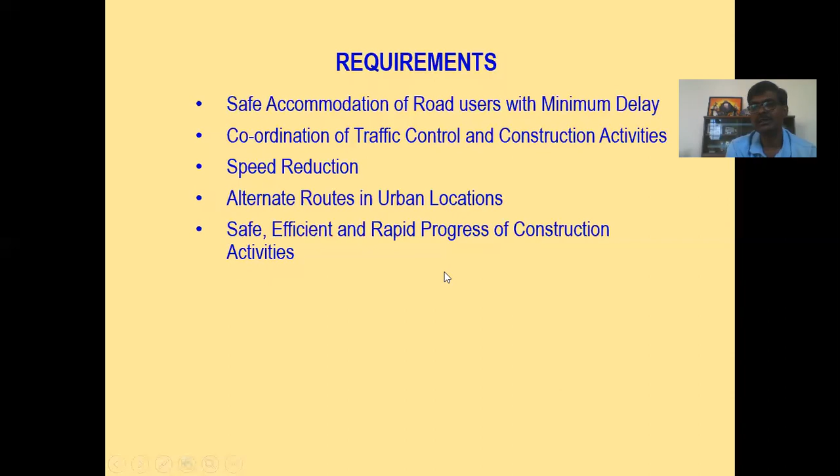And if the construction is in urban locations, we should always look for alternate routes for traffic management, traffic diversion, if there is an opportunity. So we should look for alternate routes in urban locations. And then there should be rapid progress in the construction activities so that the delay for road users is reduced. But there should be safe and efficient progress of construction activities. It's not that you are only targeting the progress. No, progress with safety is the important requirement.

There are guiding principles for safety during construction. Number one, we need to warn the road user very clearly, well in advance, not suddenly telling there is a construction activity going on. And we need to provide safe and clear marking for guiding the road users. There should be enough markings and a safe passage area for guiding the road users properly, and this guiding should be safe. So we should provide safe and very clear guidance for road users through road safety furniture, through pavement markings, and so on.

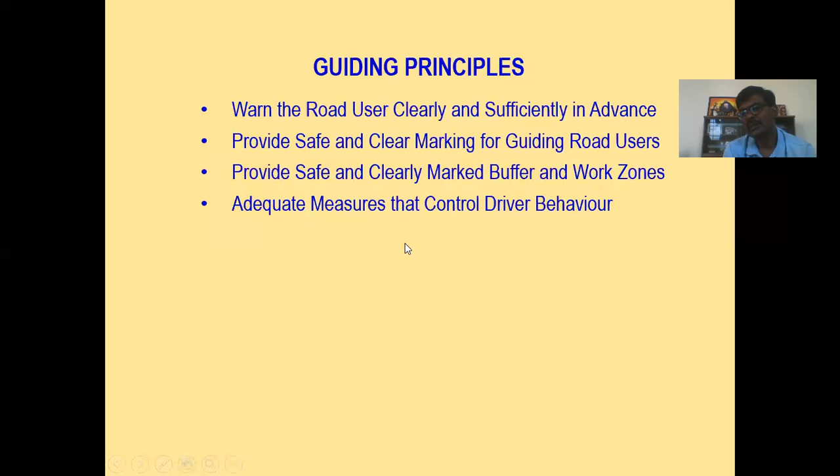The other principle is we should provide a safe and clear buffer for the work zones, both lateral and longitudinal buffer zones. What is this buffer? I'll show you a little later. We need to clearly mark which is the working zone and which is the buffer zone. And there should be adequate measures to control driver behavior when passing through the construction site. So these are the guiding principles: warning the road user well in advance, providing safe and clear marking for guiding the road user, clearly marking the buffer and work zones, and adequate measures for controlling driver behavior.

But there are some legal aspects that need to be followed for the construction zone. We need to obtain legal permission from the road authorities, traffic authorities and local police. The contractor has to obtain the permission because he is awarded the contract. He cannot just go and stop or divert the traffic or partially control access. So he has to take the necessary permissions from the authorities concerned. Number two, construction is important, but any construction activity causes inconvenience to the road user, so there should be minimum inconvenience to the traffic. The contractor has to take all necessary steps to ensure this.

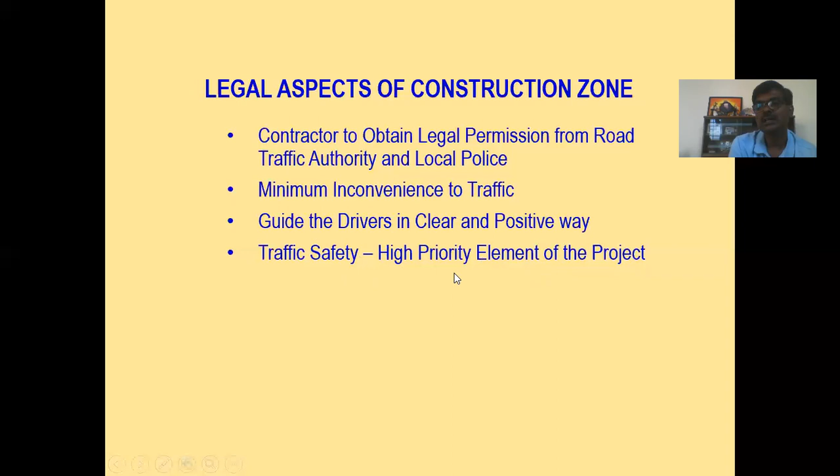And the third aspect is he should guide the drivers in a clear and positive way. Overall, traffic safety should be given very high priority. Unfortunately, this is not so in our country, but slowly we have started giving importance to it for many reasons and compulsions from the department, the police, the court, and so on. So now, truly, safety is considered a priority in construction. If you take the construction zone, there are four components in the traffic control zone.

There are four components in the traffic control zone in the construction site. Number one, warning zone. Second, approach transition zone. Third, working zone. And fourth, terminal transition zone.

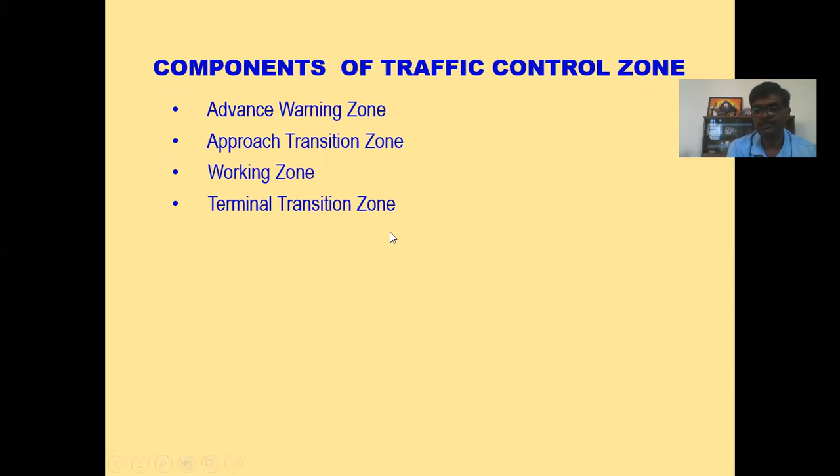So now let's look at the advanced warning zone. This zone. So what do we do in the advanced warning zone? We warn the road users about the presence of hazard. What is the hazard here? The construction. And we even tell what is the distance to the hazard, 500 meters ahead, 300 meters ahead. So we indicate to the road user the distance to the hazard and also the presence of hazard through signages.

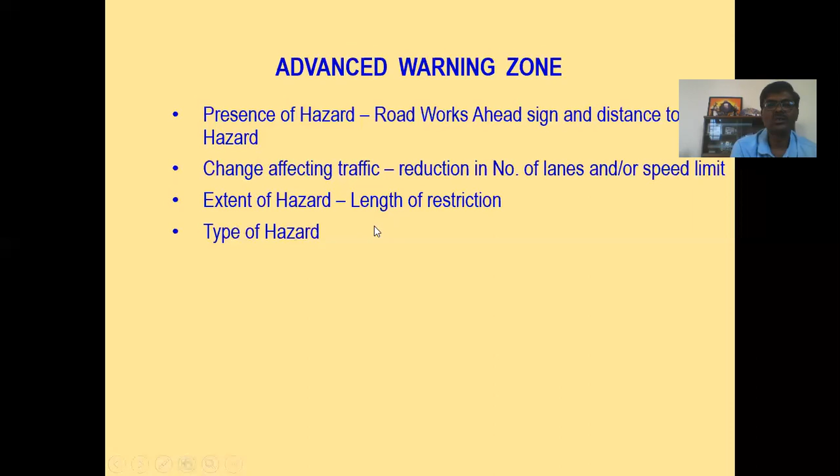So type of hazard is also conveyed here. Extent of hazard is to what length the hazard exists, for 200 meters, 300 meters, half kilometer, for next 1 kilometer. This is the extent of hazard. The type of hazard is deep excavation, overhead clearance, and so on.

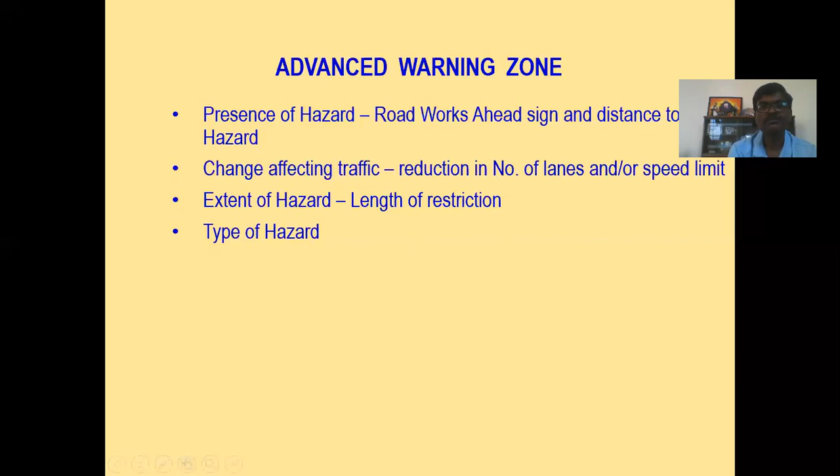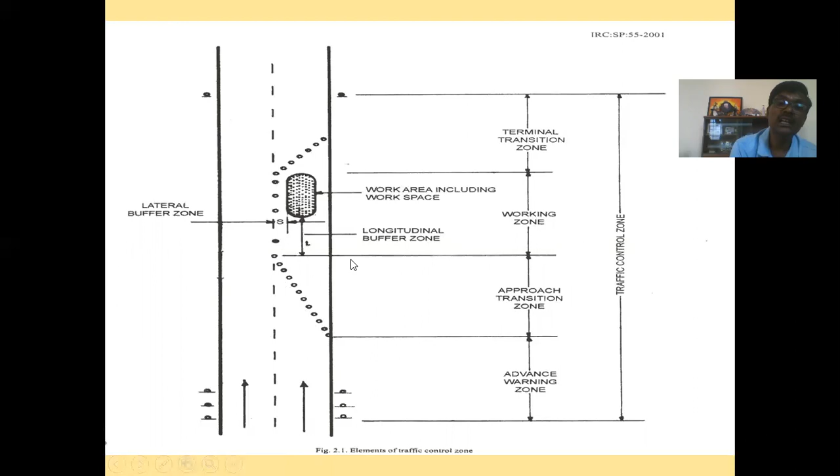Then, after the warning zone, comes approach transition zone. It's a crucial zone. There are several factors to be considered in deciding the length of the approach transition zone. Number one is the turning radius of the largest vehicle. You have seen here, this is the approach transition zone, and this length is decided based on the turning radius of the biggest vehicle using this road facility. Let's say if this barricade is perpendicular, direct 90 degree, then vehicles cannot maneuver. So depending upon the turning radius of the vehicles used, the length of transition zone is decided.

And drainage system in the construction area is to be carefully considered while deciding the transition zone, because we may be damaging the existing drainage system in the construction area, so there are chances of ineffective drainage. So we should take care of the drainage and avoid ponding of water in the construction area. So this also plays an important role in deciding the length of the approach transition zone.

In addition to that, the quantity of dust or the effect of dust that is likely to rise in that construction area also influences the length of transition zone. Barricades, signages, channelizers, markings are very essential in the transition zone. Night visibility is to be achieved through using reflective sheets, reflective paints, and we need to control the traffic through signals or by manual flagging in the transition zone, and need to clearly demarcate the waiting area in the transition zone.

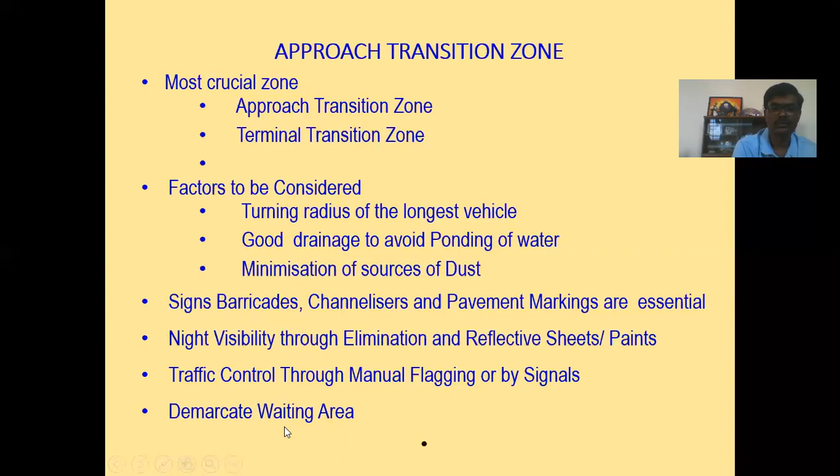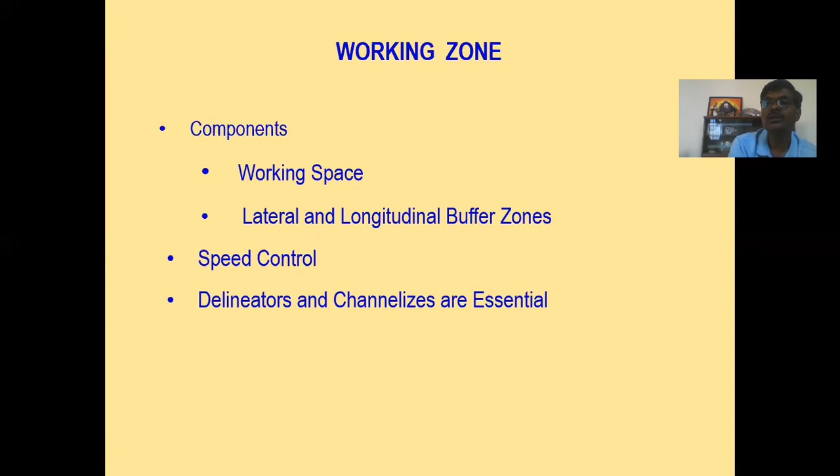So then comes our working zone, the actual working site. This working zone consists of two components. One is the actual working space, and as said, the lateral and longitudinal buffer zones. So controlling the speed in this zone is very important. We need to use appropriate road furniture and signages to control the speed. Need to effectively utilize the delineators and channelize the traffic. Channelizing and delineating the traffic are very essential aspects in the working zone, so that the work is not hindered and safety of the road users is given due importance.

Then comes our terminal transition zone, the last zone. Compared to the other zones, the warning zone, the approach transition zone, and the working zone, the length of this terminal transition zone is very less and needs to be less. This distance is only required to clear the work area and return to the normal traffic lanes, and generally this length is less. And what is the length of this terminal zone?

It extends till we see an end restriction sign. So that means this terminal transition zone ends where this signage is installed, the end restriction or end signboard. So that you should know.

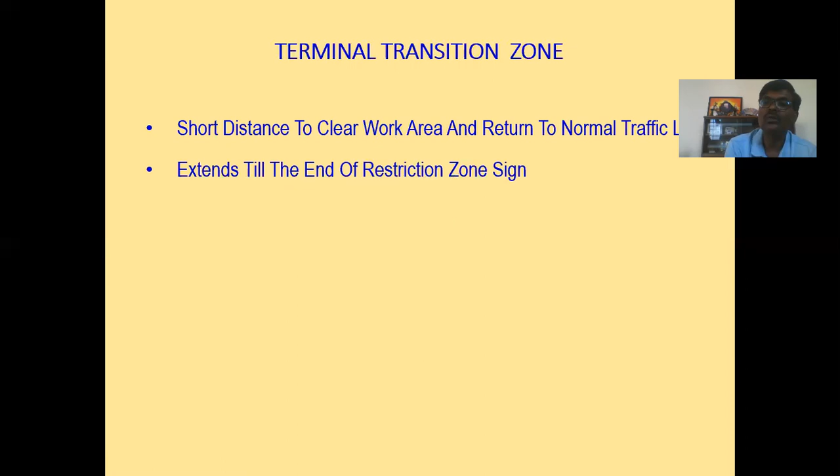So here comes the length of different traffic zones: warning zone, transition zone, working zone. And this length depends on what is the speed of the vehicle. If the speed is 50 kilometers or less than that, the length of advanced warning zone is 100 meters. The length of approach transition zone is about 50 meters, and length of working zone varies depending upon the type of construction activity and its requirement.

Let's say if the speed is more than 81 kilometers and up to 100 kilometers, the advanced warning zone varies from 300 to 500 meters. Approach transition zone varies from 100 to 200 meters. And of course, the length of working zone varies depending upon the type of activity and its requirement. So, the length of the zones depends on the average speed of the vehicles.

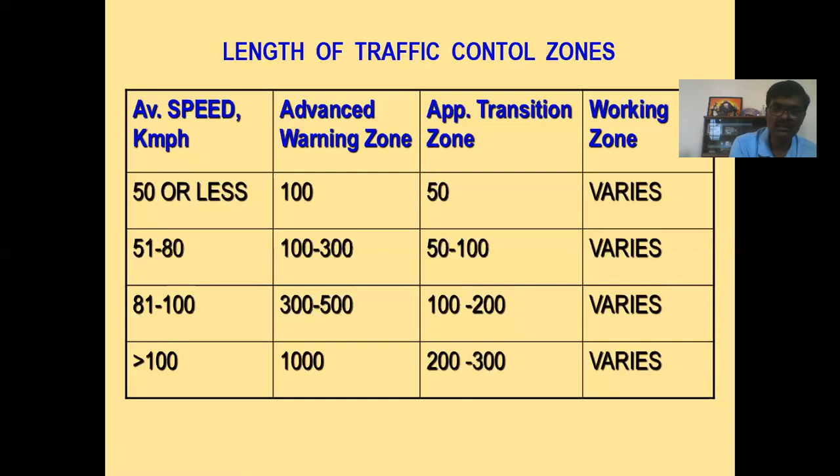As said, we need to use various traffic control devices to control, to guide, to warn the traffic in the construction zone, construction areas, construction sites. And these traffic control devices play an important role in warning the road users, informing the road users, guiding the road users, modifying the behavior of road users, and protecting the road user and also the vehicle, and provide safe working area, thus ensuring the safe passage of road users in the construction area. So these traffic control devices play an important role.

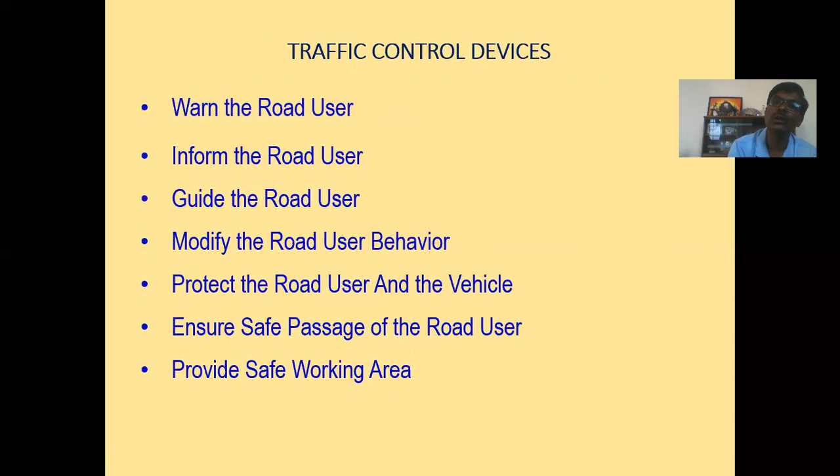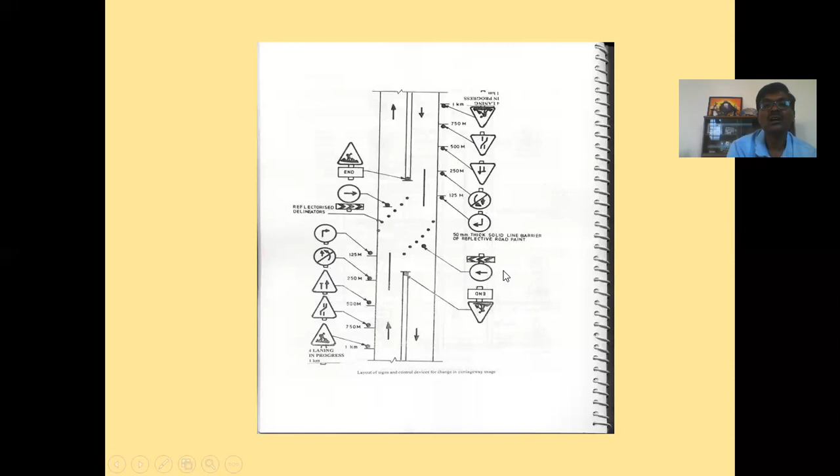That means work in progress, 1 kilometer well in advance, the signage is placed. Similarly, the change in direction of the lane is placed 750 meters ahead, and preference warning indicator signages 500 meters in advance, and so on. Similarly, on the other direction, you can also see end of the construction work signage here.

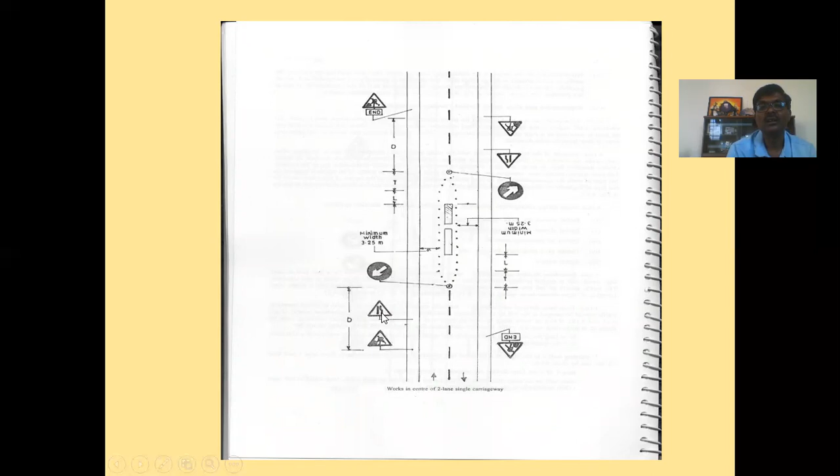So this is the work on a two-lane carriageway in the center. So here also you can see different signages, direction signs, end of construction, and reduction in number of lanes, warning about the construction site.

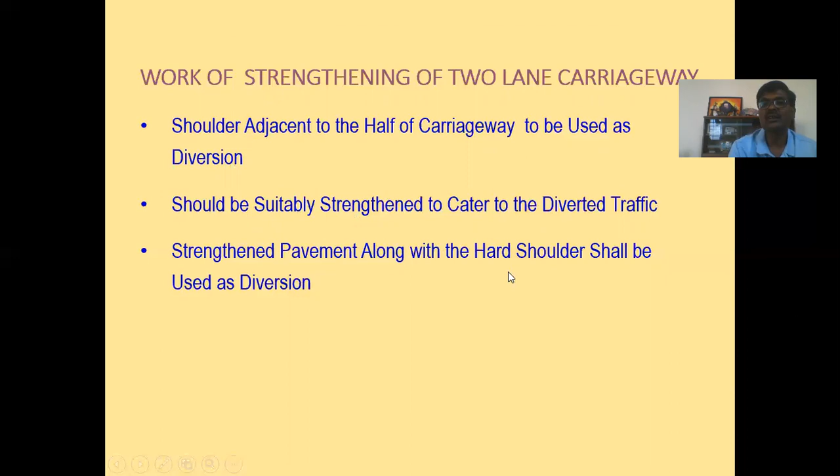So when strengthening of a two-lane carriageway is undertaken, the shoulder adjacent to half of the carriageway can be used for diversion. When we take up any strengthening work of a two-lane carriageway, we can make use of the shoulder as a diversion lane. And this shoulder should be suitably strengthened to cater to the diverted traffic, and the strengthened pavement along with the strengthened shoulder is used as diversion here.

So what treatment is to be given for the shoulders when shoulders are used for diversion, sorry, the composition of the diversion lane, is presented here when we take up the strengthening work for a two-lane carriageway. This is the treatment for the shoulders: 150 thick granular base course with a thin layer for a width of 1.5 meters. And this should be there for a 500 meters length, and the quality of the surface is to be maintained.

What is presented here in this PPT is, when we take up the work of strengthening of a two-lane carriageway, shoulders can be used for the diversion lane, and they need to be strengthened using these pavement layers: 150 thick granular base course, something like wet mix macadam, a thin surface layer, maybe surface dressing, mix seal surfacing, and they should be continuous for 500 meters.

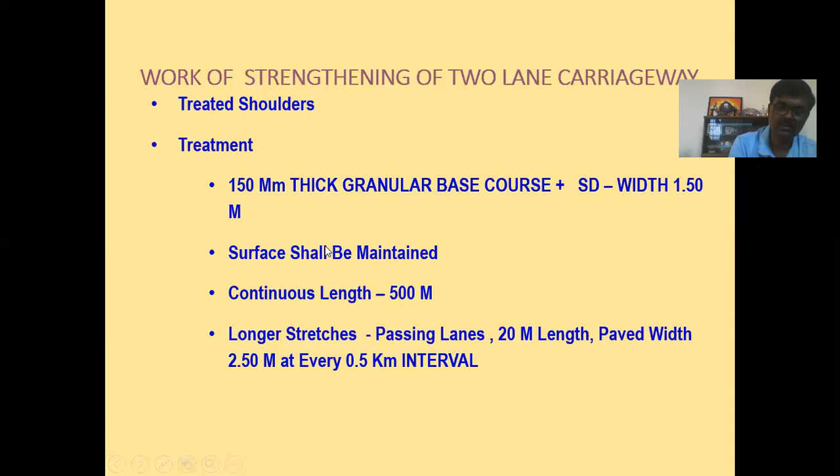If the construction activity is longer than 500 meters, then we need to construct passing lanes of 20-meter length, paved width of 2.5 meters at every 0.5 kilometer interval. So if the length of construction site is more than 500 meters, then we have to construct what are called passing lanes of 20-meter length with a paved width of 2.5 meters at every 0.5 kilometer interval. So this is the treatment to be given for the shoulders when we take up strengthening of a two-lane carriageway. When we do the temporary diversions, there should be a smooth horizontal and vertical profile.

Just because it is a temporary diversion, we cannot have a poor horizontal and vertical profile. And these diversions are not to get overtopped by flood or drainage discharges, and should have adequate capacity to cater to the projected or existing traffic.

And these diversion roads are to be dust free. There should be clear visibility both during day and night. Because it is a temporary diversion doesn't mean that visibility should be poor. No, there should be clear visibility both during day and night. There should be barricades to prevent the construction materials from falling on the diversion road. Proper barricades should be there. Barricading should be carried out.

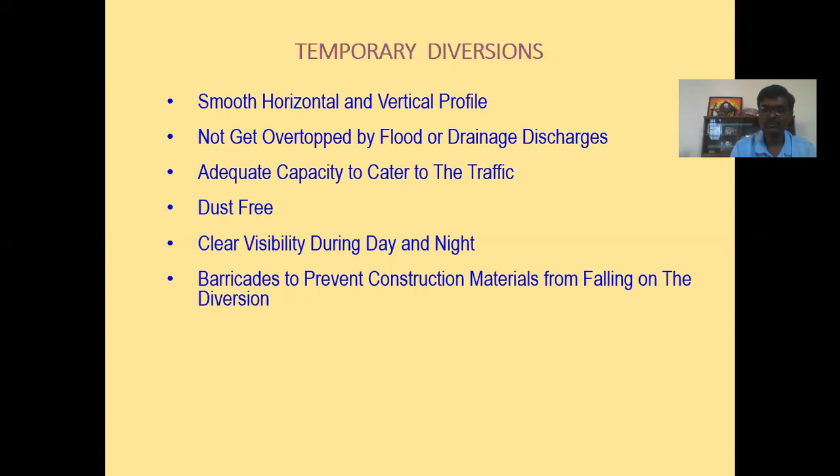Temporary diversions are required when it is not possible to allow traffic on one part of the carriageway, and the specifications, the guidelines for temporary diversions are here. Carriageway of 7.0 meters, shoulder of 2.5 meters, and this is the pavement composition: 200 mm compacted granular subbase, 225 mm of granular base, and a thin layer, mix seal surfacing also, and other such layers.

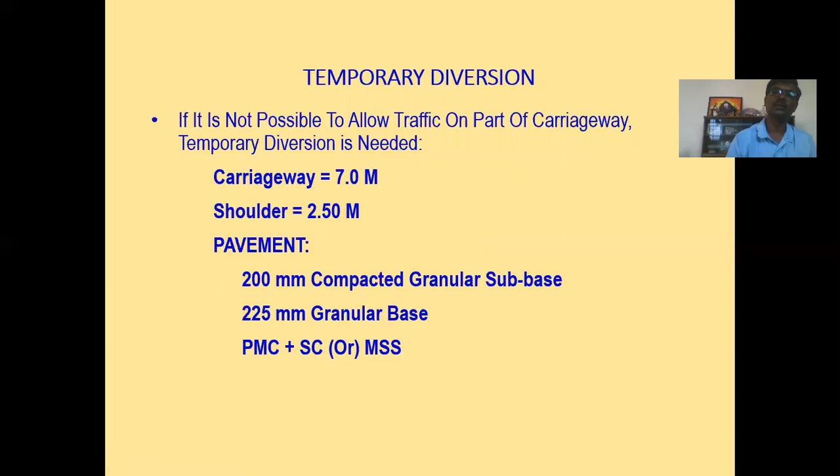We need to follow some traffic management practices at the work sites. We can have different traffic control methods depending upon the speed of the vehicles, length of the work zone, length of transition zone, and the traffic volume. So depending upon the traffic volume, length of work zone and transition zone, and the speed limit, the type of traffic control methods are chosen to control the traffic in the work sites. Here are the methods: give and take system, priority sign method, stop and go method, portable traffic signal method.

When do we go for give and take system? When the maximum speed limit is 50 kmph, the length of work zone and transition zone is 50 meters maximum, and two-way traffic is only 400 vehicles per hour, with maximum 20 commercial vehicles per hour. When this kind of traffic situation exists, and if this is the length of work zone and transition zone, and this is the maximum speed limit, then we can go for give and take system.

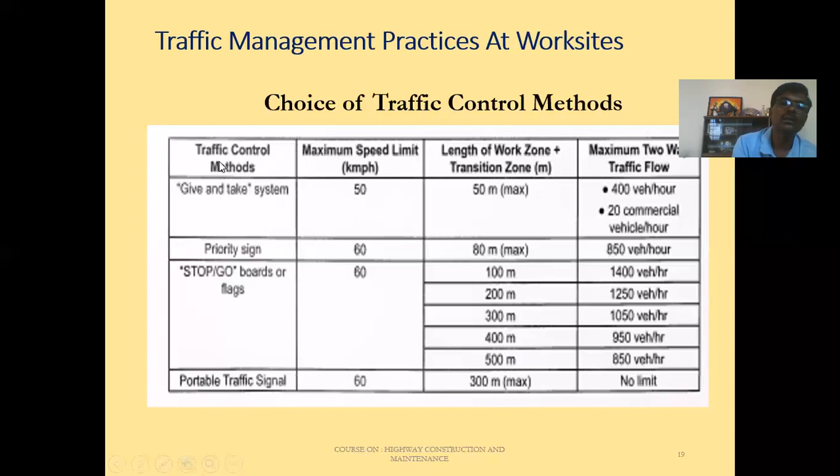And we can go for priority sign method if the maximum speed is 60 kmph, and length of work zone and transition zone is 80 meters, and the maximum number of vehicles in the two directions is 850 vehicles per hour. We should select portable traffic signal method of traffic control when the maximum speed limit is 60 kmph, and length of work zone plus transition zone is maximum of 300 meters, and there is no limit for the traffic. So depending upon the traffic, the length of work zone and transition zone and the speed, the traffic control methods are chosen.

And this figure shows the traffic control by give and take system. This is the traffic lane. This is another traffic lane. You can see the signages, men at work, signage indicating the reduction in the number of lanes. So there are hazard markers, and there is a direction control sign. And these are the barricades, and this is the actual construction site. Similarly, the other direction.

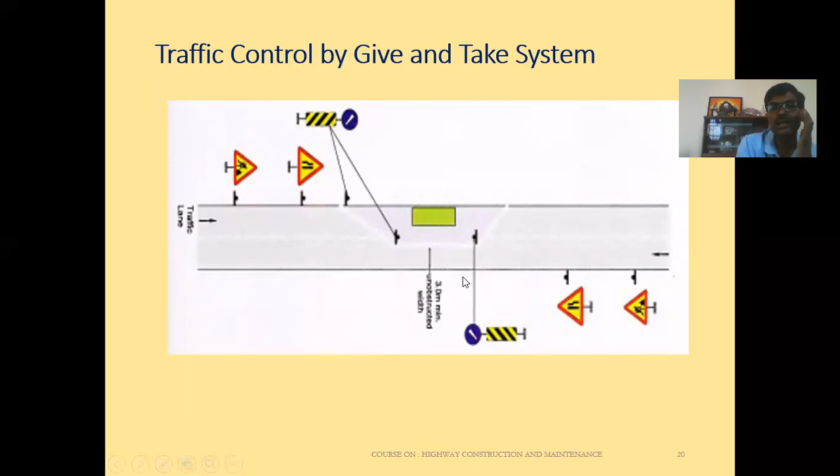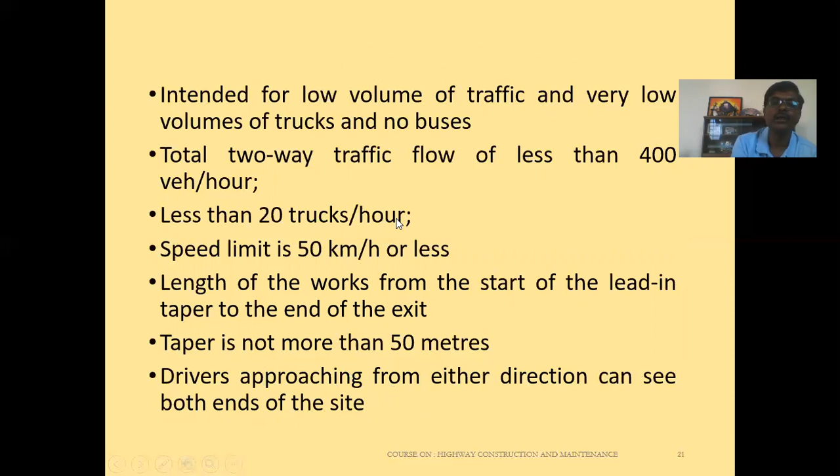So we can adopt this give and take system when there is low volume of traffic, and there are less number of trucks and no buses. The total two-way traffic flow is less than 400 vehicles per hour, the trucks are less than 20 per hour, and speed limit is 50 kmph or less. The length of works from the start of the lead-in taper to the end of the exit taper is not more than 50 meters. Drivers approaching from either direction can see both ends of the site. So when drivers approaching from both directions can see both ends of the site, this system we can adopt, provided the traffic is less and speed is less.

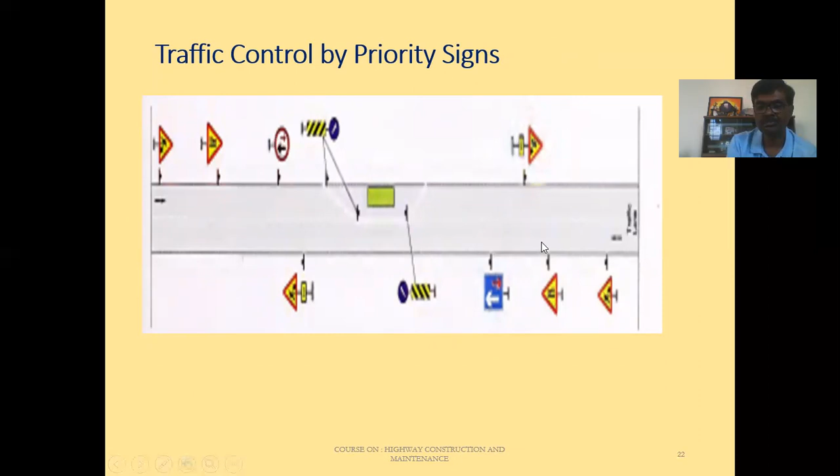So when the two-way traffic is less than 850 vehicles per hour, this choice can be adopted, and the tapering should be not more than 80 meters. Drivers approaching from either side can see to the side from the point of 60 meters from their transition zone to a point of 60 meters beyond their terminal zone.

If the speed is less than 50 kmph. In case of higher speed roads, the appropriate clear visibility distance is 70 meters on 60 km per hour roads, and this is not applicable if the speed is more than 60 kmph.

Priority must be given to either the unobstructed vehicle or vehicles going up a steep gradient. So priority is given to the unobstructed vehicle where the obstruction is not there in a particular lane. That lane traffic is given the priority, or the vehicles going on a steep gradient are given the priority.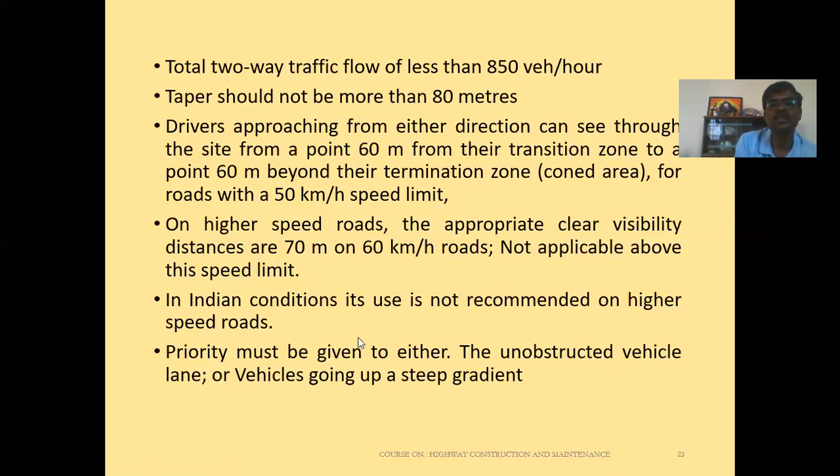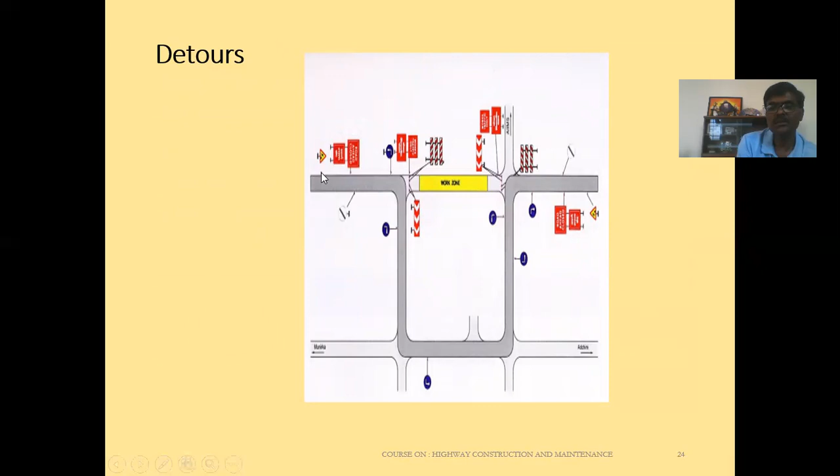This is detour. This is the construction area, and this is the diverted route. So the signages you can see. This is another method. Here the traffic is rerouted to an alternate road so that the traffic totally avoids the work zone. When the traffic is diverted from the road under construction or improvement to an alternate road, construction works proceed very rapidly. So this will improve the construction efficiency, quality, and ensure safety for the workers from passing vehicles.

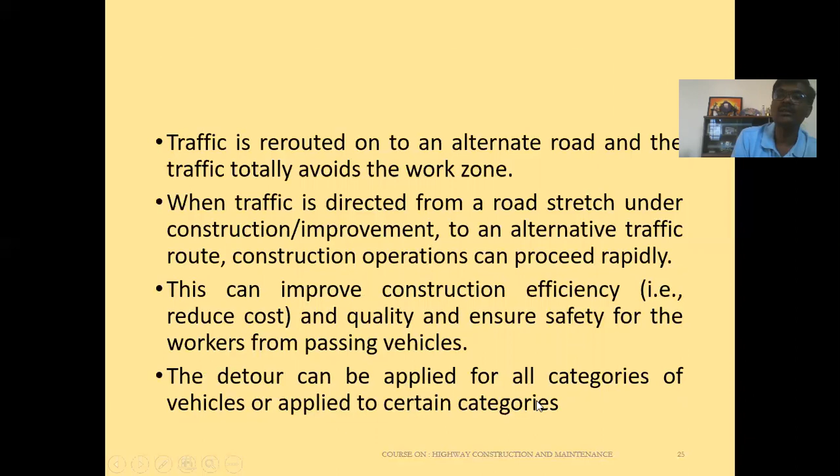So this detour can be applied for all categories of vehicles, or applied only for some categories of vehicles depending upon the site situation. So this detouring imposes additional capacity, and the load demands on the alternate road may cause congestion. Safety considerations on the detour route should be duly considered, particularly if the detour route goes through vulnerable areas like residential areas, school zones, etc.

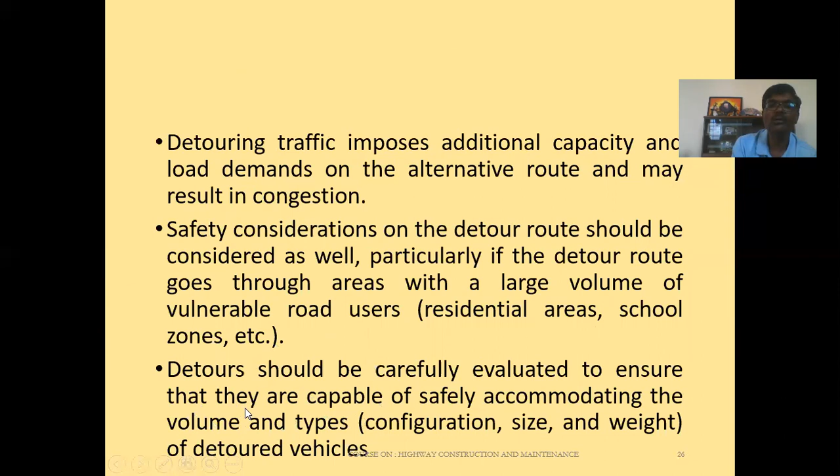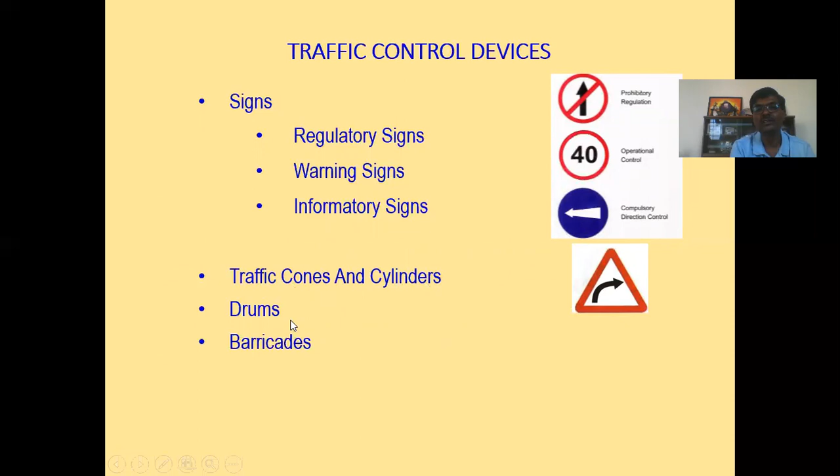And detours should be carefully evaluated to ensure whether these routes can safely accommodate the passage of the type of vehicle and the traffic volume before implementing. Use different traffic control devices to control the traffic in the construction site: prohibitory signs for controlling the traffic, and mandatory signs and warning signs. Use different types of traffic cones, cylinders, drums, and barricades for controlling the traffic.

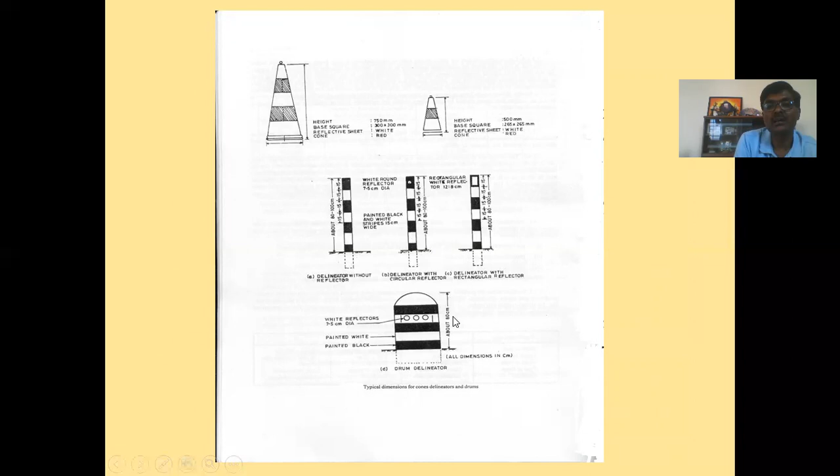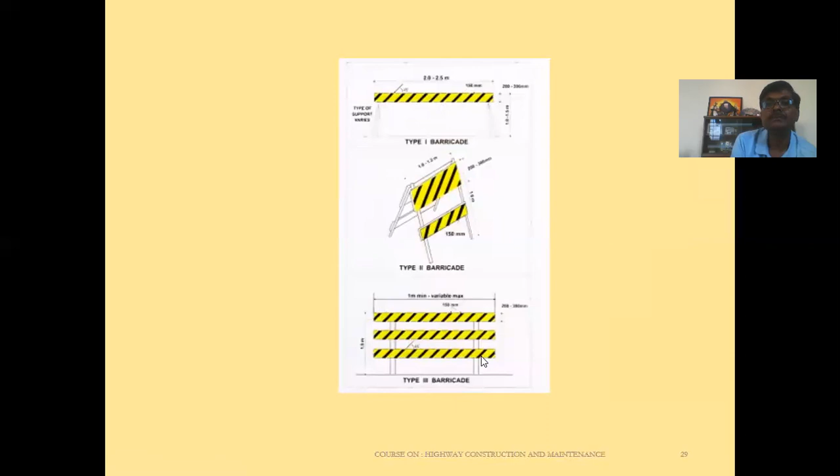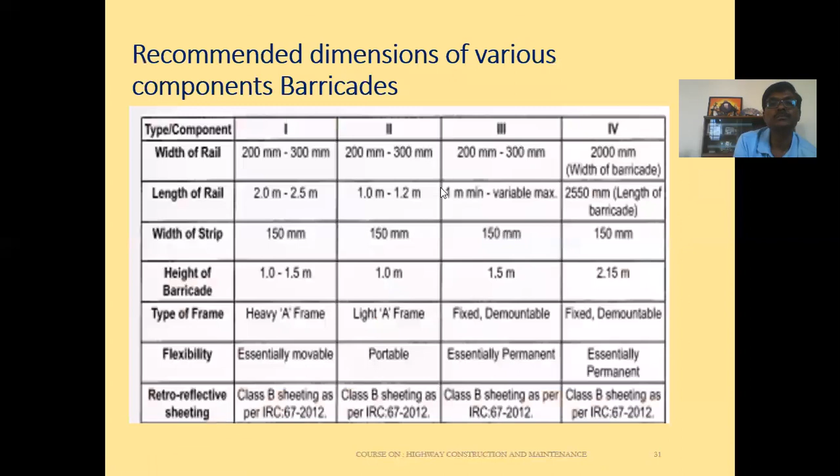So what are the recommended dimensions for different components of these barricades? The components of the barricades, like the width and length of rail, the width of strip, height of barricade, type of frame, flexibility and retroreflectivity, vary with respect to different types of barricades. So for type 1, type 2, type 3, the width of rail varies from 200 mm to 300 mm. For type 4, it's about 2000 mm.

The length of rail varies from 2 to 2.5 meters for type 1 barricade. For type 2, it is 1 meter to 1.2 meters. And for type 3 barricade, the length of rail is 1 meter minimum and maximum varies. And for type 4, it is 2550 mm. The width of strip is 150 mm for all types of barricades. The height of barricade varies from 1 to 1.5 meters for type 1, 1 meter for type 2, 1.5 for type 3, and 2.15 meters for type 4 barricade.

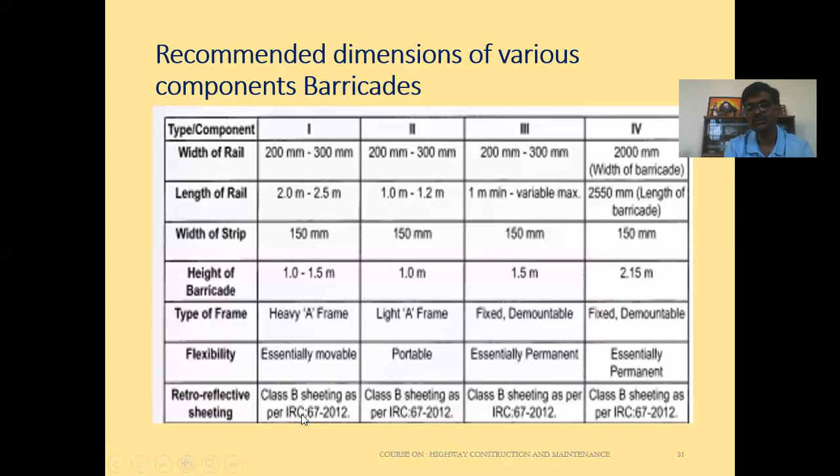The type of frame is heavy A-frame for type 1, light A-frame for type 2. It is a fixed demountable frame for type 3 and also for type 4. Coming to the flexibility, type 1 is essentially movable, type 2 is portable, type 3 is permanent, and type 4 is permanent. The retroreflective sheeting to be used for barricades is class B sheeting for all types of barricades.

So type 1 and type 2 barricades are used when traffic is redirected. These type 1 and type 2 barricades can be used interchangeably and are more useful for repair work that is initiated on an emergency basis. The support for type 1 and type 2 barricades should be of A-frame configuration, or hinged or otherwise flattened at the top, to permit convenient folding and stacking for transportation.

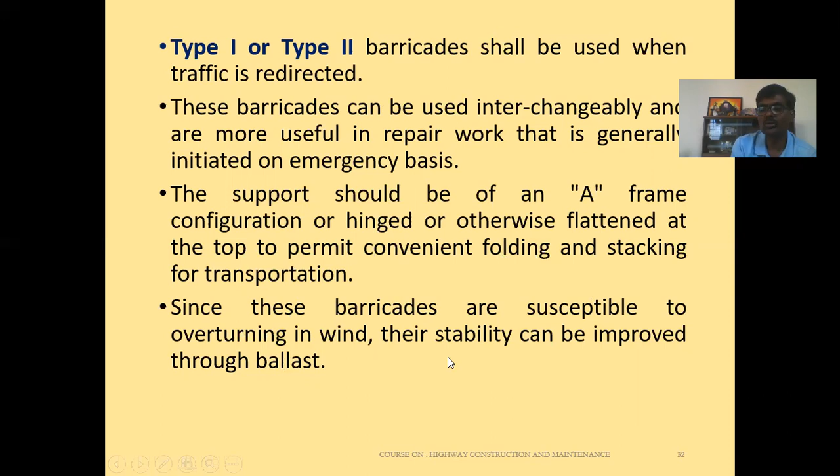Since these barricades are susceptible to overturning in wind, their stability can be improved through ballasting. Type 3 barricades are permanent type and can be made up of wood or metal.

These barricades are erected at a point of closure when a road section is closed to traffic in the construction site, and these barricades may extend completely across the roadway and its shoulder or from curb to curb.

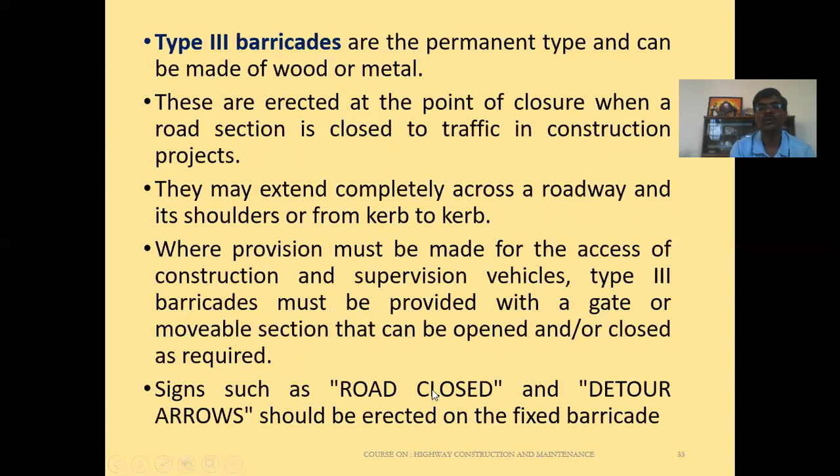So where provision must be made for the access of construction and supervision vehicles, type 3 barricades must be provided with a gate or a movable section that can be opened or closed as and when required. Signs such as road closed and detour arrows should be erected on the fixed barricade.

Type 4 barricades are again used when long duration works are carried out. In urban areas, they serve the purpose of screening and the separation of traffic from the work area, but should not be expected to provide much protection.

Therefore, Type 4 barricades should be installed at such locations, which should prevent all kinds of entry and exit by the road users and construction workers to the workplace, and also for those works which are not intended to be seen by the public, so that they don't distract the driving attention.

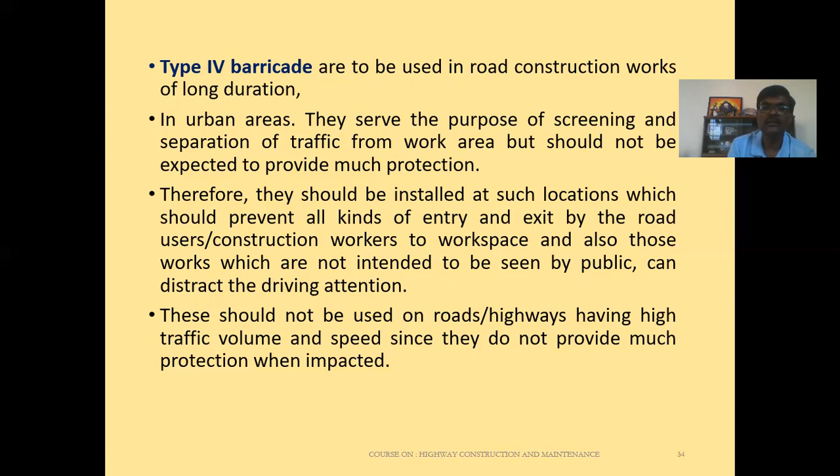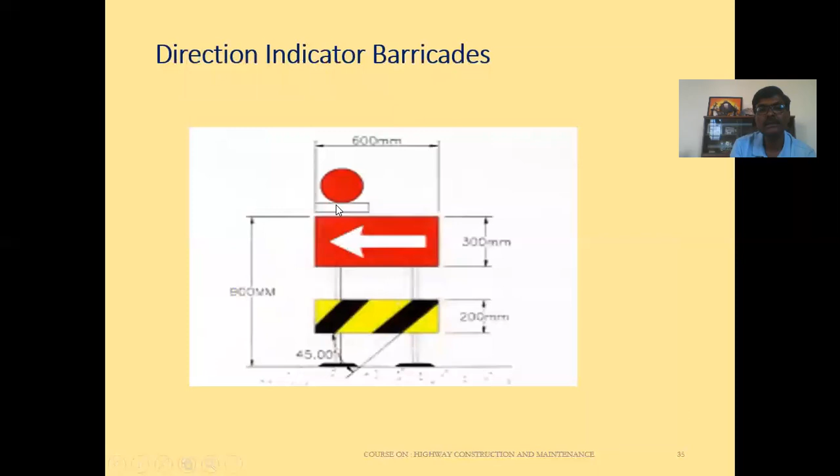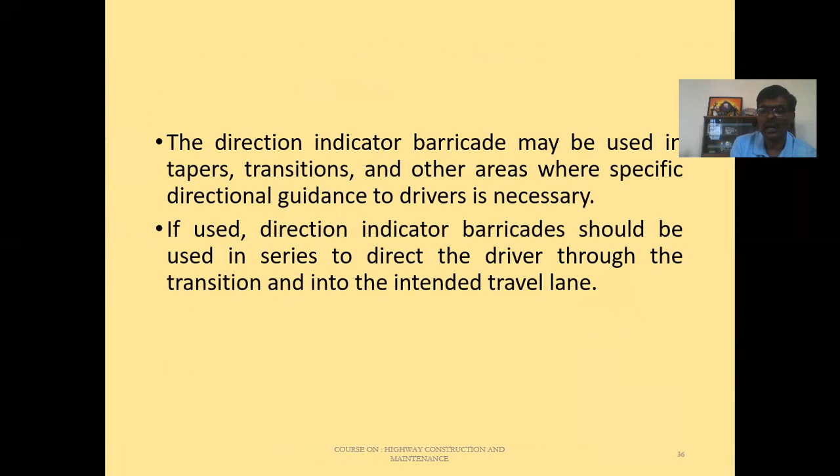This direction indicator barricade may be used in tapers, transitions, and other areas where specific directional guidance to the drivers is necessary. If used, direction indicator barricades should be used in series to direct the driver through the transition and into the intended travel lane.

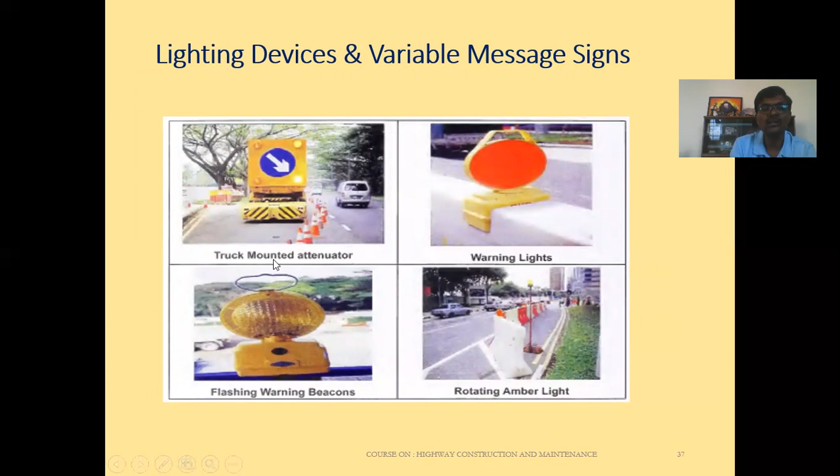So there are various lighting devices and variable message signs here. These are the warning lights, truck mounted attenuators, flashing warning beacons, and rotating amber light. So lighting should be provided in the construction sites, and these lighting devices are used to supplement the channelization.

Maximum spacing for the warning lights should be identical to the channelizing device spacing requirements. Four types of lighting devices are commonly used in work zones: floodlights, flashing warning beacons, warning lights, and steady burn electric lamps. These lighting devices may be used to supplement retro-reflectorized signs, barriers, and channelizing devices.

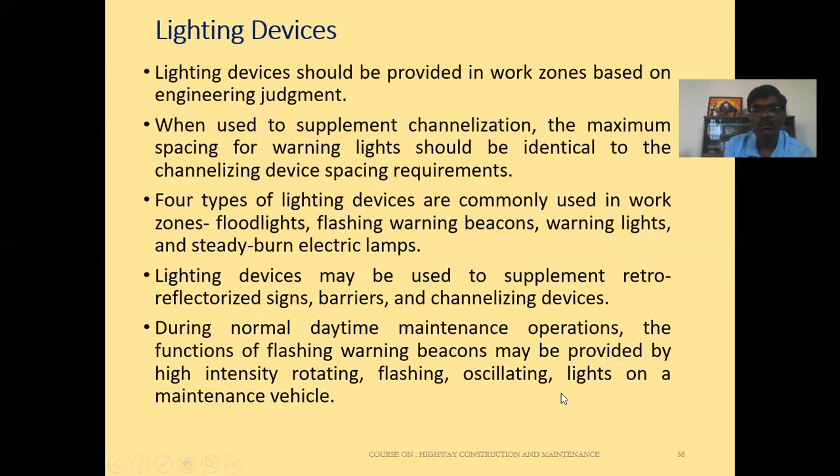During normal daytime maintenance operations, the functions of flashing warning beacons may be provided by high-intensity rotating, flashing, or oscillating lights on a maintenance vehicle. Then come the floodlights. Utility, maintenance, or construction activities on highways are frequently conducted during nighttime periods when traffic volumes are lower.

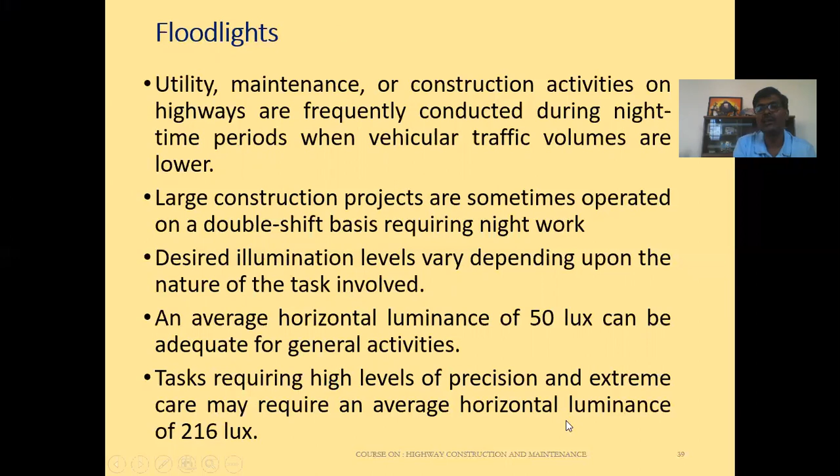So large construction projects are sometimes operated on a double shift basis, requiring night work. Desired illumination levels vary depending upon the nature of the task involved. An average horizontal luminance of 50 lux can be adequate for general construction activity. Tasks requiring a high level of precision and extreme care may require an average horizontal luminance of 216 lux.

So type A low intensity flashing warning lights are used to warn the road user during night time that they are approaching or proceeding in a potentially isolated hazardous area. Type A warning lights may be mounted on channelizing devices. Type B high intensity flashing warning lights are used to warn the road user both during daylight and night time that they are approaching a potentially hazardous area.

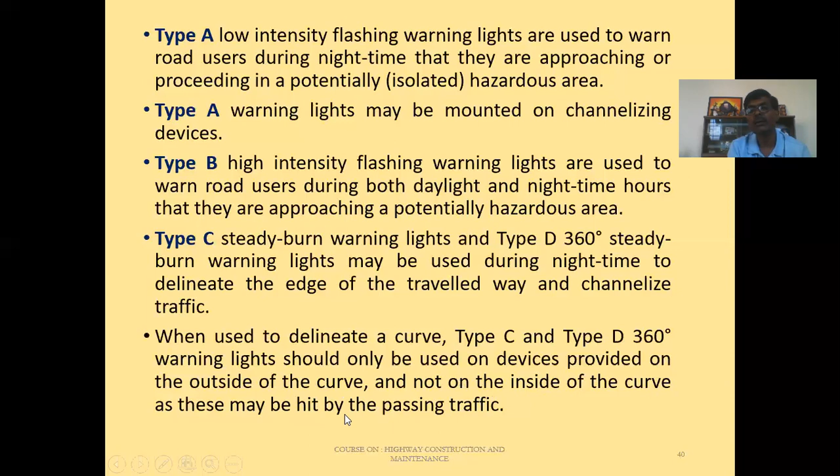Type C steady burn warning lights and type D 360 degree steady burn warning lights may be used during night time to delineate the edge of the traveled way and channelize the traffic. When used to delineate a curve, type C and type D 360-degree warning lights should only be used on the devices provided on the outside of the curve and not on the inside of the curve, as these may be hit by the passing traffic.

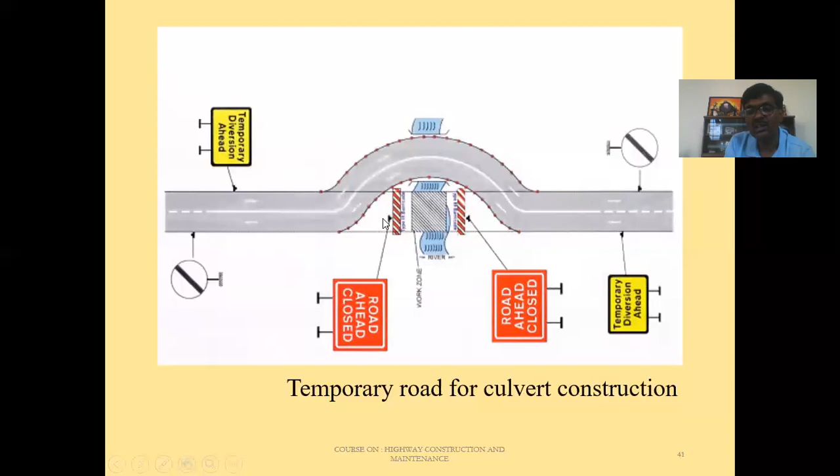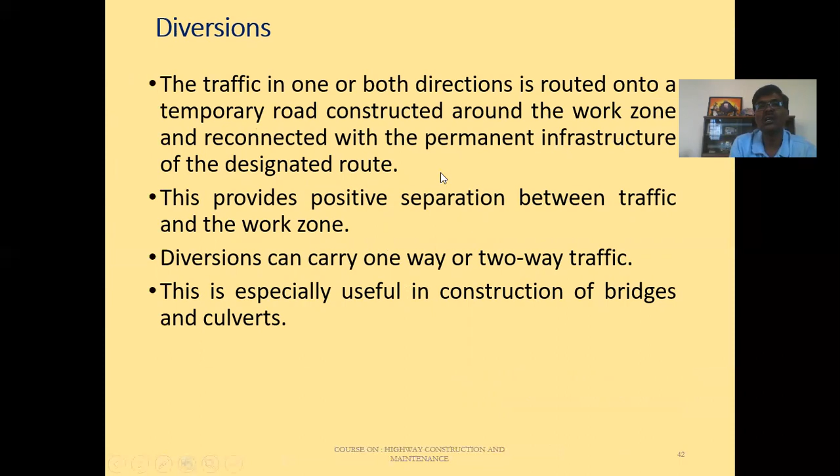So this diversion, traffic diversion: the traffic on one or both directions is routed onto a temporary road constructed around the work zone and reconnected to the permanent infrastructure of the designated route. This provides a positive separation between traffic and the work zone. Diversion can carry one-way or two-way traffic.

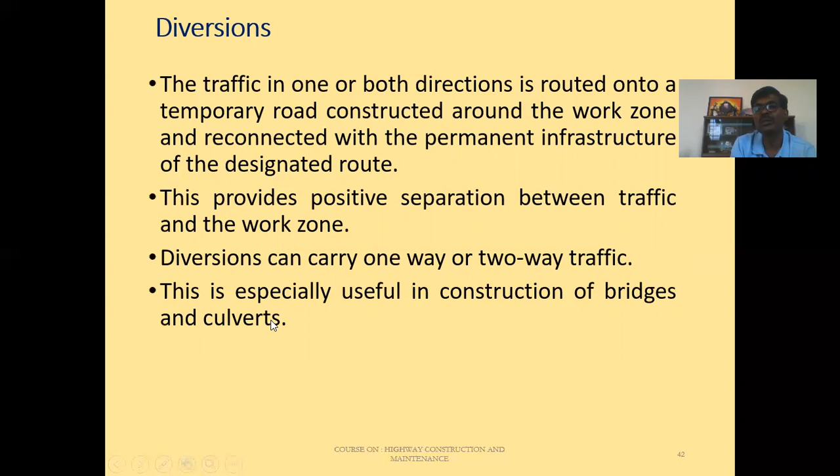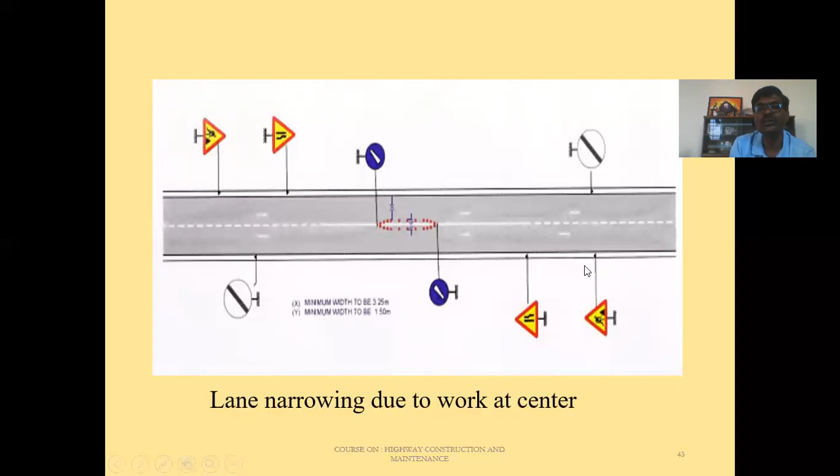So lane constrictions. This strategy entails reducing the width of one or more travel lanes. This strategy should be adopted when maintaining traffic with less than desirable travel lane width is preferable to other alternatives. This can raise safety concerns, and therefore reduced speeds are very critical when you go for this method.

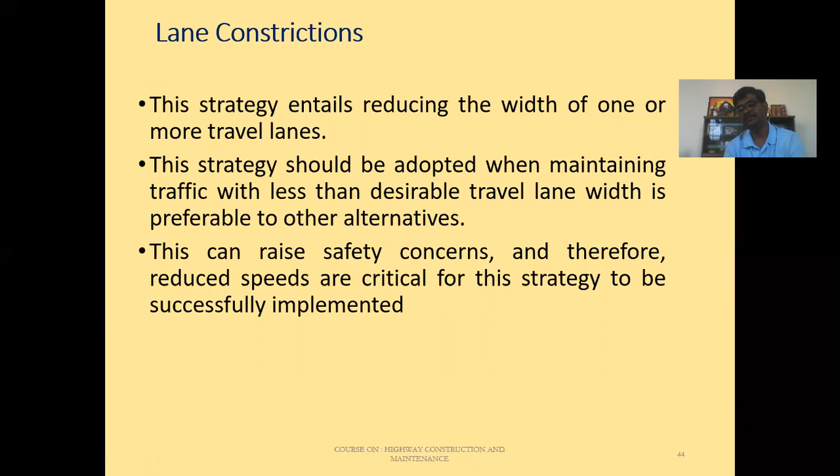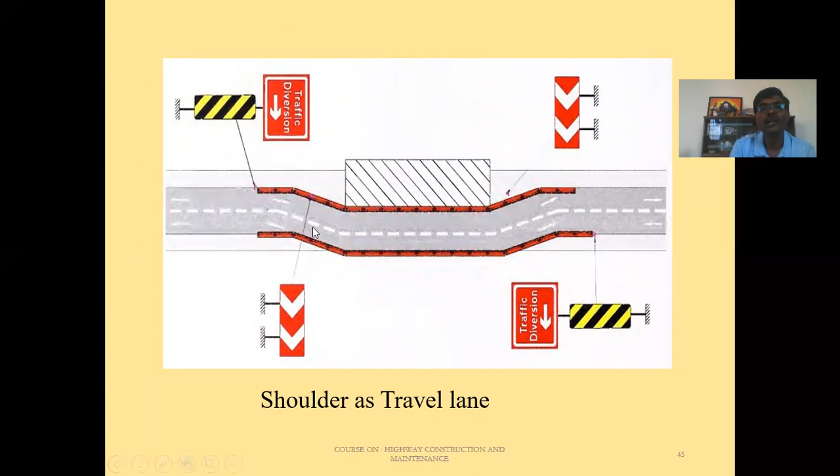This picture shows using the shoulder. This is the shoulder, this is the carriageway, and the shoulder is made use of here for the diversion. So shoulder as a travel lane. So the outside or inside median should be used as a temporary traffic lane. This may require constructing or upgrading the shoulder pavement structure to adequately support the expected traffic loads.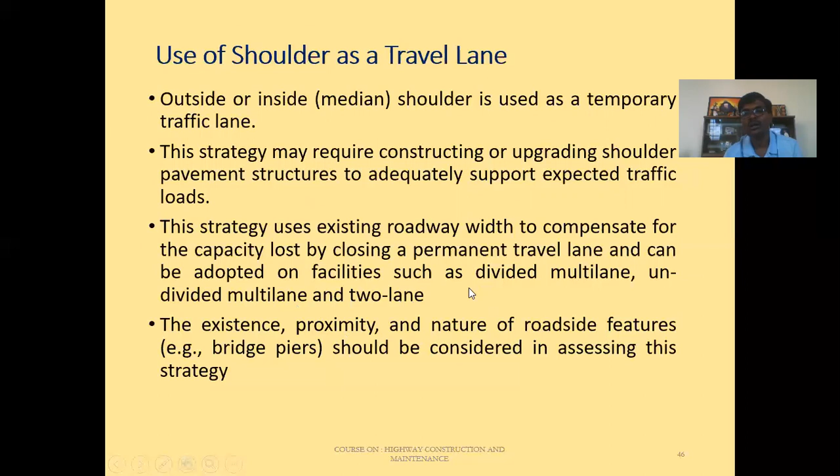And this strategy uses existing roadway width to compensate for the capacity lost by closing a permanent travel lane, and can be adopted on facilities such as divided multi-lane, undivided multi-lane, and two-lane roads. The existence, the proximity, and nature of roadside features, for example bridge piers, need to be considered in assessing this strategy.

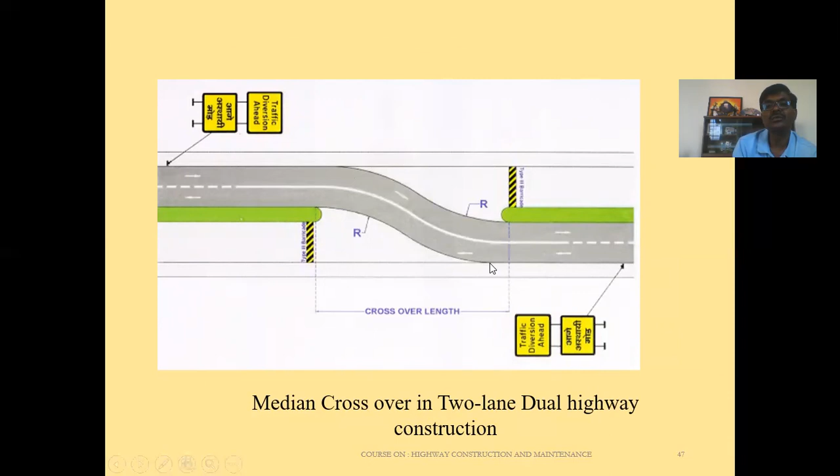So this is median. This figure shows the median crossover in a two-lane dual highway construction. So this is the median, and you can see the median crossover here. Traffic coming from this direction is turning, coming to this side of the median. So this median crossover strategy is most suitable on expressways and divided carriageway highways, where two-way traffic on a normally divided highway facility is allowed.

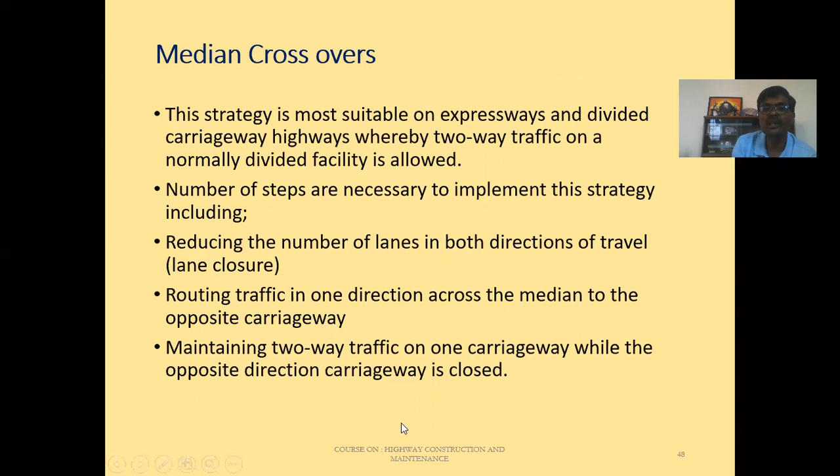A number of steps are necessary to implement this strategy, which include reducing the number of lanes in both directions of travel, that is closing the lanes, routing the traffic in one direction across the median to the opposite carriageway, and maintaining two-way traffic on one carriageway while the opposite carriageway is closed.

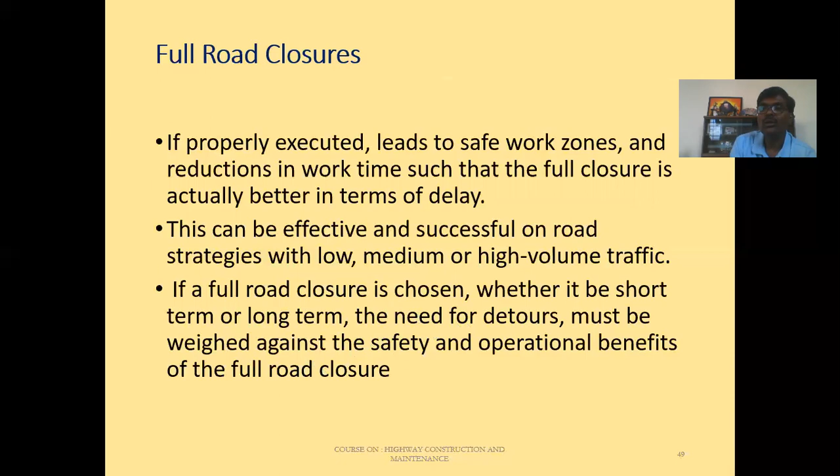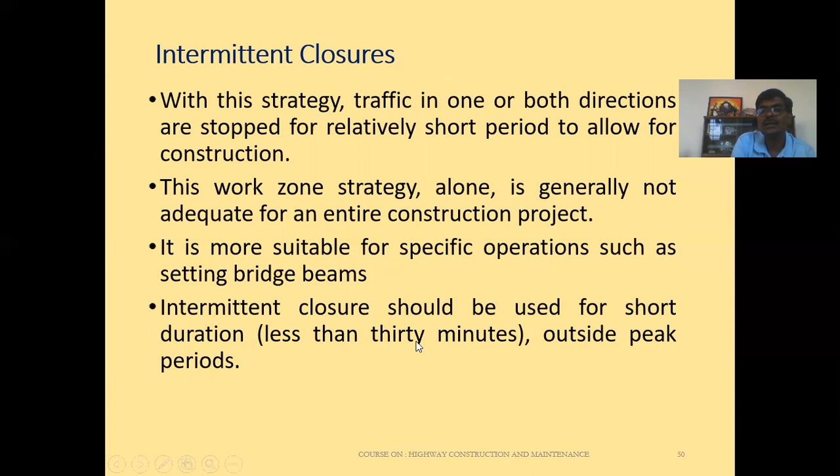So the other one is intermittent closures. With this strategy, the traffic in one or both directions is stopped for a relatively short period to allow for the construction. This work zone strategy alone is generally not adequate for an entire construction project. It is more suitable for specific operations such as setting bridge beams. Intermittent closure should be used for short durations, maybe less than 30 minutes, outside the peak periods.

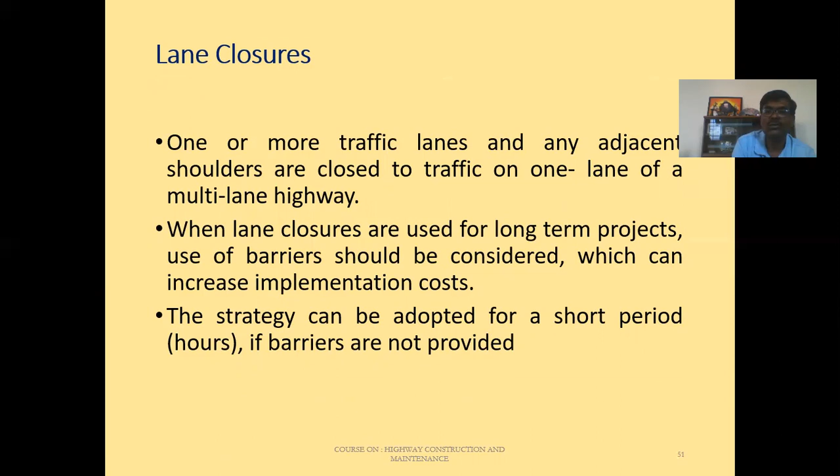So the next one is lane closures, when one or more traffic lanes or any adjacent shoulders are closed to traffic on one side of a multi-lane highway. So when lane closures are used for long-term projects, use of barriers should be considered, which can increase the cost of implementation. This strategy can be adopted for a short period, maybe a few hours, if barriers are not provided.

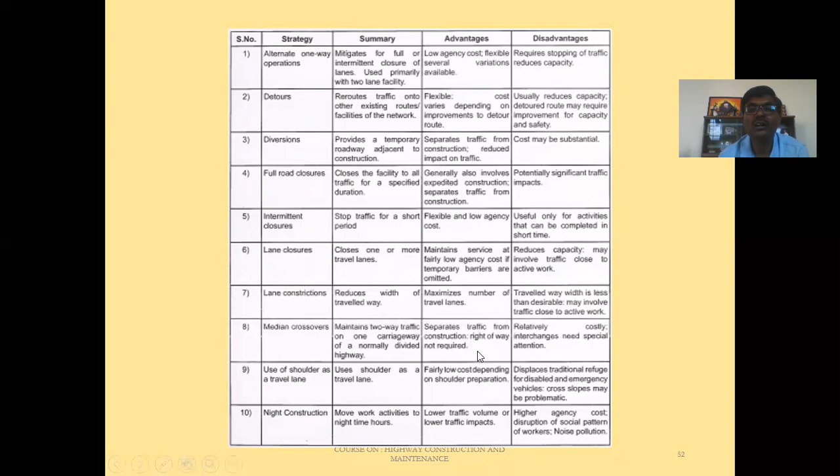Let's take median crossovers. What is a median crossover? Maintains two-way traffic on one carriageway of a normally divided highway. What is the advantage of this strategy? Separates traffic from construction. Right of way is not required. So what is the disadvantage of median crossovers? Relatively costly. Interchanges need special attention.

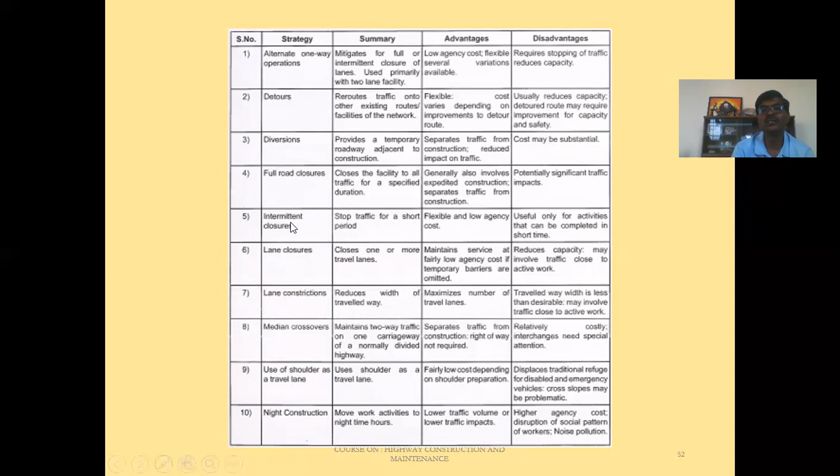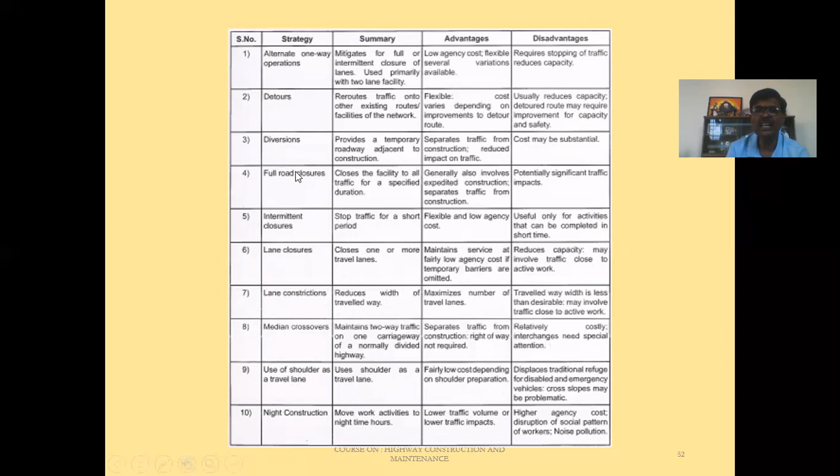So the different strategies available for traffic management in construction sites, their salient features, their advantages, and their limitations are mentioned in this table. I think this table is visible. So thank you. So we are closing down the discussion on safety during construction.